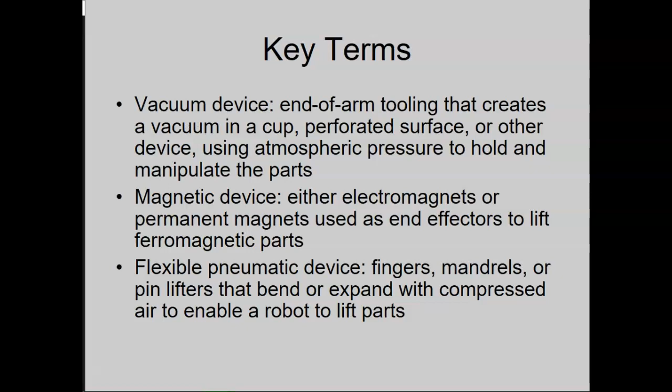So the device, we call it the EOAT, end of arm tooling. Sometimes it's called the end effector. Basically, a lot of people try and call it a gripper. Now, is every tool a gripper? No, it's not. But it's used so widely because it kind of got into mainstream terms. It's kind of like, why is a battery known as a battery and not a cell? Because everybody calls them batteries.

So the function or purpose is to actually do the job the robot was designed for. So think about the tool at the end of the arm like your hand. Anything you do with this, and the dexterity of your hand, these guys are able to do, as long as you create the right tool for it. If you do not have a hand at the end of your arm, the whole arm's kind of useless, right? It can't do anything, because this is what does every job.

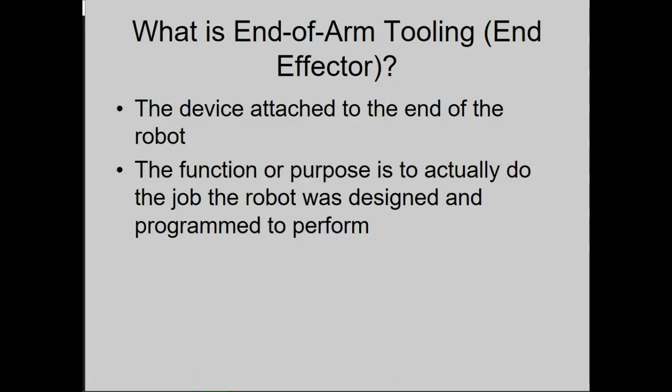I don't care if it's picking up a soda can, writing something, doing things in your day-to-day life, driving and everything else, all of it has to revolve around our hand, right? Without the hand, everything goes, right? That is the whole purpose behind an end-of-arm tool. The whole purpose is to manipulate and move and use the hand it's attached to. Because otherwise, what's the point?

Otherwise, what is the point? So tooling must be able to do what it's meant to do. Here you see it talking about gripping, holding, and releasing. However, that only applies to grippers, or if you're having to pinch something together like a welder. That does not apply so much to something like a paint sprayer, because all a paint sprayer's got to do is spray paint. It's not gripping or grabbing anything.

The tooling can be... I'm going to have to rechange that whole sentence because I don't like the word optional sitting in front of that. The tooling must be able to respond to signals indicating the presence of a part. That is completely optional, okay? I'll tell you why. It's a good idea to do something like that, but that does not mean it has to talk to the robot itself. A lot of the times you have go-betweens between the robot and the line it's attached to, or the equipment it's attached to, generally through PLCs. Now, PLCs will take the signal from sensors and send it back to the robot's controller saying, hey, this has been tripped, execute the program that goes with this.

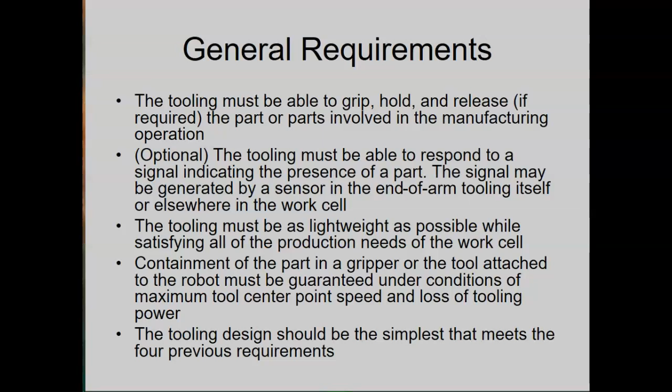Just to clarify again, the whole reason we call these tools things like end of arm tooling - you might hear it as EOAT, the abbreviation for it. You might also hear it called the end effector. You will often hear the term gripper, but it is not generally used in the correct way. A lot of people like to call the end of arm tool a gripper. It is not always a gripper. These guys can do anything you can imagine, not just pick things up and move them.

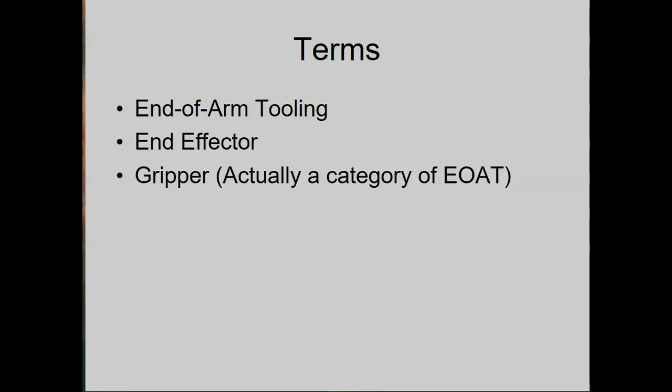So one of the top power supplies for a tool typically is pneumatics. Now, why pneumatics? What do y'all think?

Well, you're on the right track. It's not just so much the air compressor.

The whole reason we like to use pneumatics is for a couple of different things. One, most every shop or factory has a pneumatic compressor. It's a very easy thing to run. You can run pipes and tubes anywhere you need to. It's a very flexible system.

Two, it's very environmentally friendly because once I'm done using the air, it's still just air. I can release it back to the wild. So it's a very clean energy source.

So pneumatics is one of the top things that we use because it is what it is. Basically, you're pulling in air, you're compressing it, and then you're putting it into the tool. There's really not an easier technology. You have springs. Springs are sometimes used.

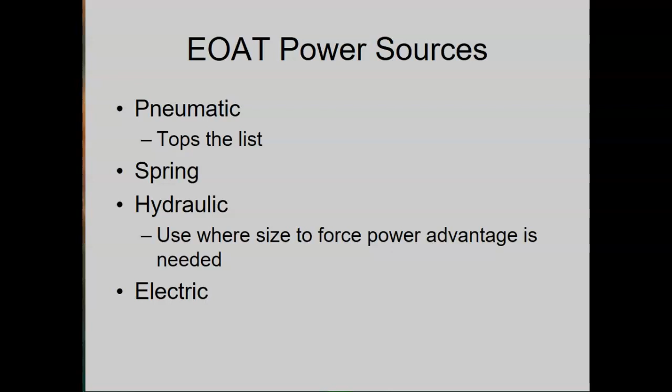So, like I said, hydraulics and pneumatics are the ones that are mainly used, especially pneumatics. Pneumatics are the big popular one, simply because getting it from point A to point B is about like no effort at all.

So you have groups of EOAT. You have standard grippers, which again, I don't really much like the term gripper, but we'll go with it. You have vacuum devices, magnetic devices, flexible pneumatic devices, and special purpose tools.

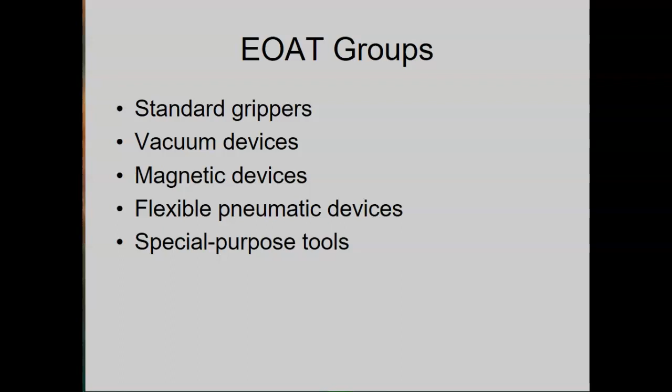Standard grippers - there's a lot of different ways you can make a gripper. The ones we typically think of are like the ones on these 4 robots, a standard parallel gripper. I can also make a gripper with 3 prongs if I'm trying to pick up something cylindrical, or I could bore a hole in a parallel gripper and pick it up that way. It always depends on your needs. Whenever you get a robot, you design that tool based on your needs, not somebody else's design. You base it on what it's going to be doing.

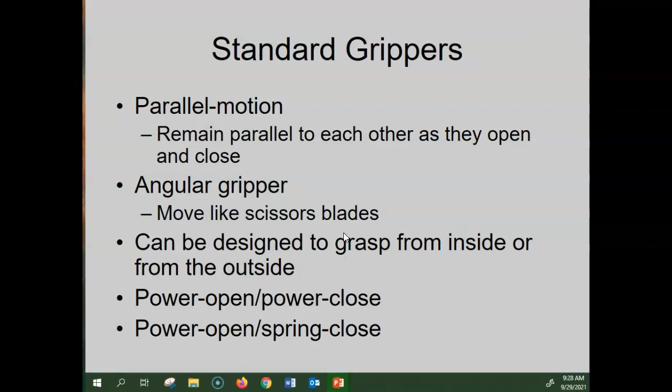So we have parallel motion, where they remain parallel to each other as they open and close. You have angular grippers that move like scissor blades. As far as grasping from the inside or the outside, you have to be kind of careful with those. So you have your angular and your parallel. Parallel is again what we typically think of as a gripper, but I can change the configuration any way I need to so that I can pick up what I've got to pick up. All it takes is a little bit of ingenuity.

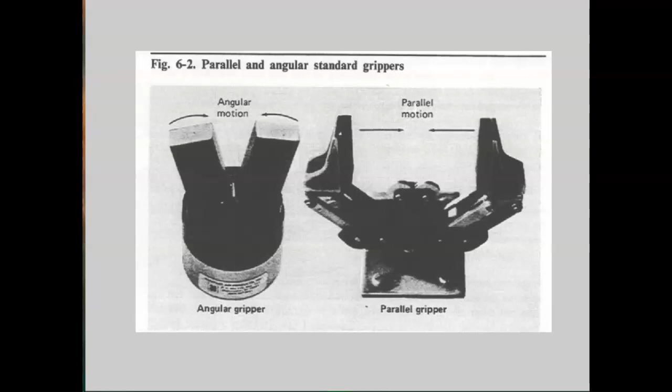The way you pick it up is going to depend upon the product. If the product's outside is delicate, easily broken, you might not want to use pneumatics for that because pneumatics is very hard to control the pressure - exceedingly difficult to control an output pressure. Why? Because air does not like to be told what to do sometimes. So sometimes you're going to come down and grip the externals, but if, let's say it's painted, then instead of messing with the paint on the outside, I might come down on the inside, push it open, and pick it up. Does that make sense?

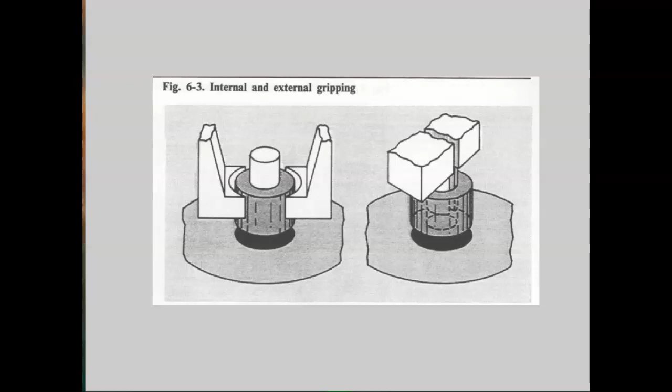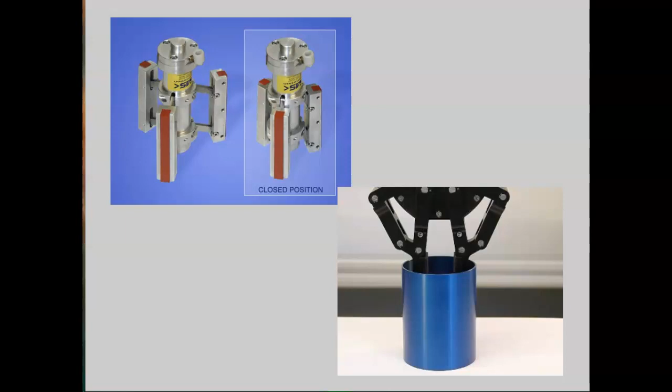Again, it's all dependent upon the product you're dealing with. You don't just have to have a parallel gripper set of 2, you can have a parallel gripper set of 3. For this one, you could run it only one way, because whenever you are not applying force to it, it's going to close itself in. Then you put it down inside the product, trigger it, and it expands itself to fill the space so it picks it up easily. You got the scissor grippers doing the same here.

So, servo versus non-servo grippers. With grippers, we typically keep them very low tech. Why? Because the lower tech you keep something, the less you have to fix it. That's the honest to God truth. The lower tech and the simplest you keep a design, the less you got to crawl through it to fix it.

So you do have some grippers that have the ability to vary their pressure and have tactile sensors to measure that pressure, but that is not the most common nor the norm. The most common ones are open loop systems, and that grip strength depends completely on the air pressure being applied to the system. Most tooling's open loop, again, because it just makes it that much easier to fix down the line. Not to mention, most objects - I won't say all - are fairly sturdy. They're not going to need excessive pressure.

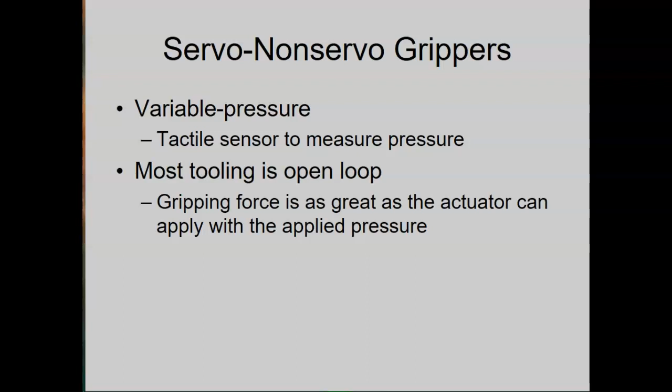We generally keep the pressure about 60 psi, maybe up to 120 if it's a really heavy object. Most of the time, if it's not heavy, we reduce the pressure and we don't have to worry about the gripper breaking it whenever it closes in. So some of them do have tactile sensors, but it is not the norm.

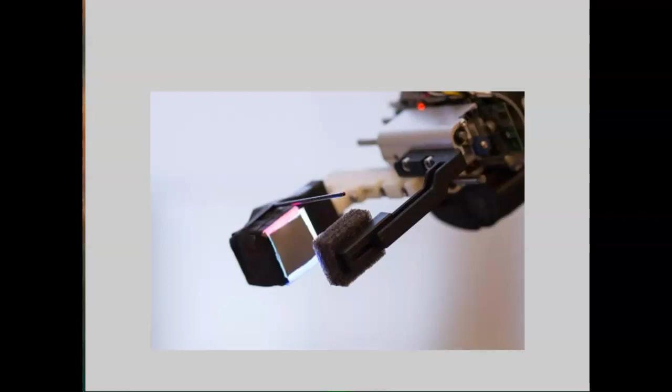You have vacuum devices, used very frequently as well. Why? Because as long as your product is not too heavy, or you can put enough suction cups to it to help you lift it, then they're actually a really good way to pick something up without damaging it.

So atmospheric pressure is 14.7 psi at sea level. What does that mean to y'all? Why is it something we would talk about? Well, the higher you get off the ground, the less pressure there is. The lower you get into the sea, the more pressure there is. With pneumatics, you have to account for that 14.7 psi difference, because that's the air pressure around you - basically the air pressure that's holding you to Earth.

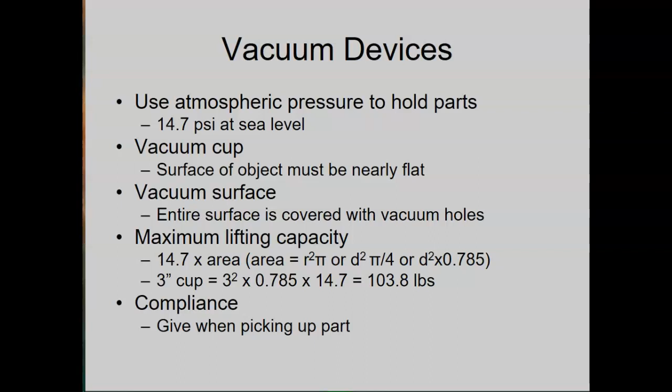So, excuse me, let me back up. What they're describing here is that, again, we talked about 14.7 being the normal pressure at sea level. That means that when you are at sea level, every surface has 14.7 psi pressing against it. Now, why don't we feel that? Well, because we are used to it. This is what we've literally been working with for eternity. All right?

But it also means that that's not helping you whenever you want to get into your jar of spaghetti sauce. Because, I don't know if any of y'all know anything about canning, but the way you can something is essentially you expand all the air out of it by putting it in boiling water. Then you put a cap on it, and when it cools, it creates a vacuum.

Because cold air is what? Cold air kind of is dense, right? So instead of this loose hot air, because hot air expands, cold air retracts, creating that vacuum, which makes it to where the cans will seal.

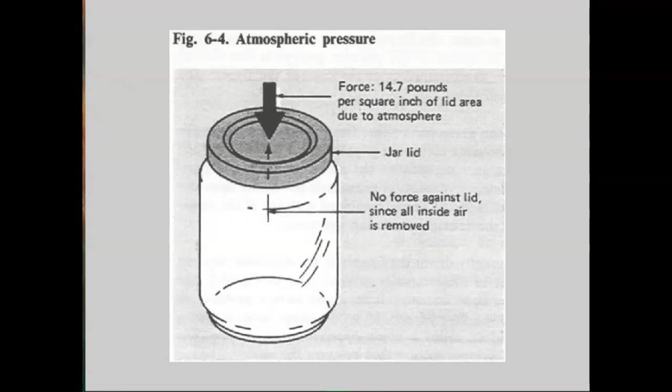Okay? So when you create a vacuum, that's the whole issue with trying to get it open. Okay, so we use vacuums quite frequently, again, not generally for overly heavy things most of the time, just because if you lose power to the vacuum, you don't want something heavy crashing down on your floor. All right.

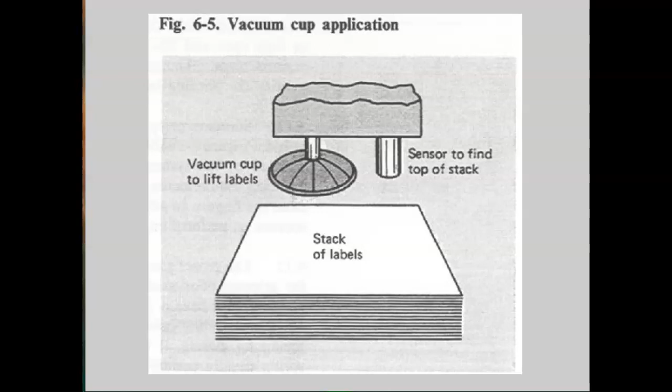So here's some different ways to do it. And the configurations come in whatever is necessary for what. What is it you're trying to pick up, right? What is the size and shape of what you're trying to pick up, and how do you need to pick it up? If you're going to use vacuum power, you need to make sure your surface is completely, A, clean, and B, flat. Right? You can't have little ridges and bumps all in it. It can't seal around that. Right?

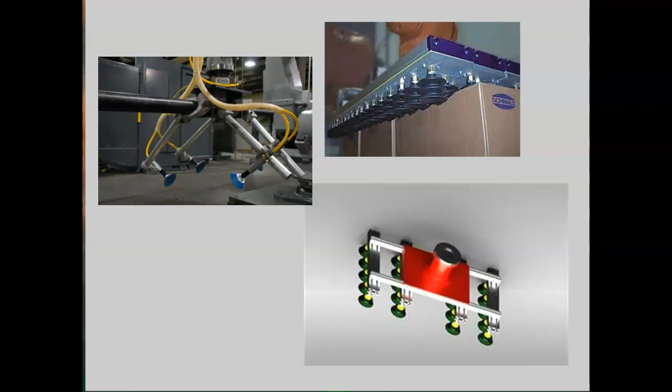But you especially want it clean, because why do we want it clean? So you get good suction to it. Okay? That, and you really want to be careful not to get a bunch of dust into your vacuum generator. That can damage it quite a bit. So we like to use these in fairly clean environments.

Magnetic devices, we have two different types. We have the electromagnet and the permanent magnet. The electromagnet is a better, well, I'm going to say this is my opinion. An electromagnet is a better way to go with these because you can use electricity to turn that on and off. Versus a permanent magnet, which you would have to create a contrary electric field in order for it to let go. That or you're going to be scraping it off the magnet, which is not a really great thing.

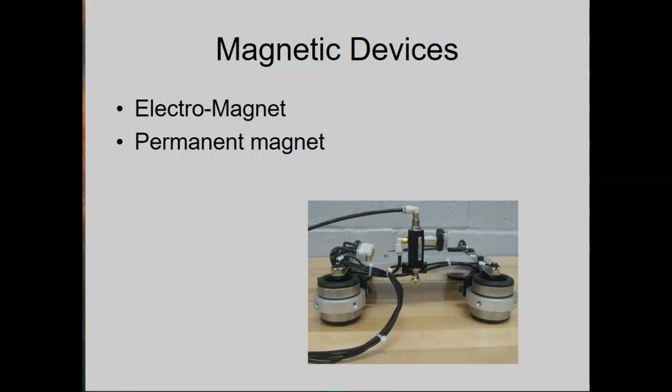So if you want to think about what an electromagnet is, think about the cranes at something like a junkyard. Those are electromagnets because they use electricity to help pick stuff up, especially heavy metallic objects. Now, that does come as a double-edged sword because if you are the person that's picking up something really heavy and you lose electricity without backup, you're going to be dropping whatever it is. So, some things are good, but they can also have their bad side.

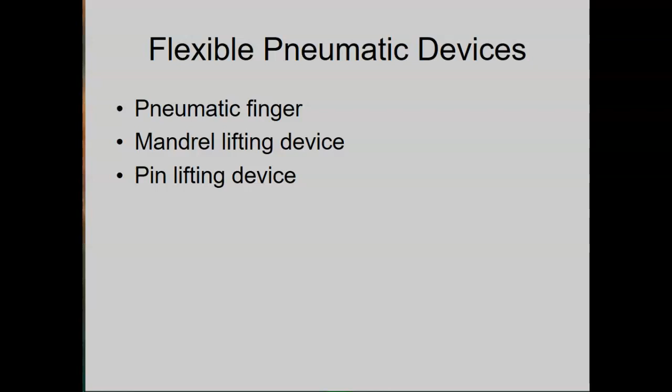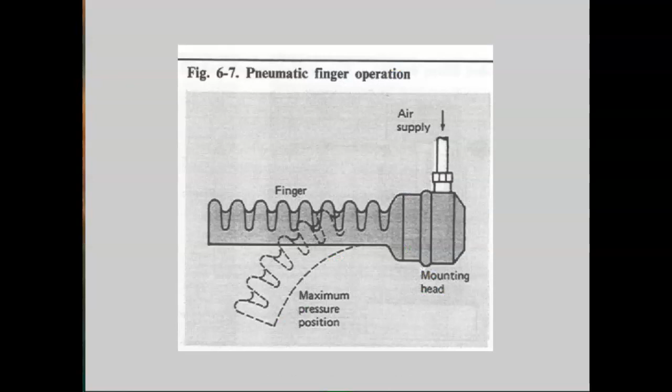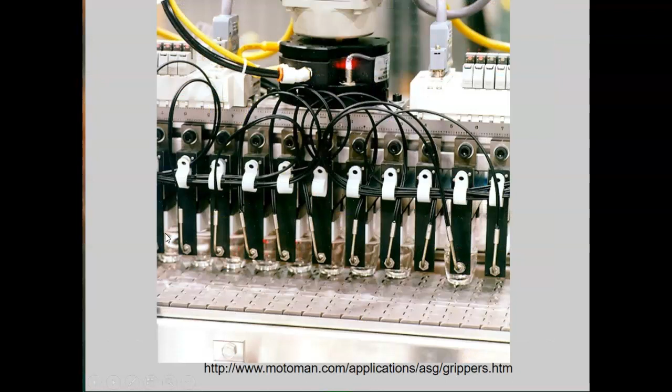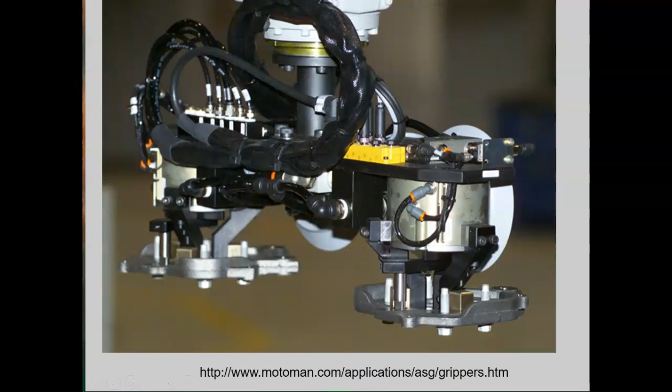Here's another way, same thing here. Trying to see exactly what they've done here, but I think they're trying to use some sort of a gripping device, but I can't really tell. What you can see is presence devices here. Not quite sure what they meant to put on there. So robots can do basically anything we ask of them as long as we give them the right tool.

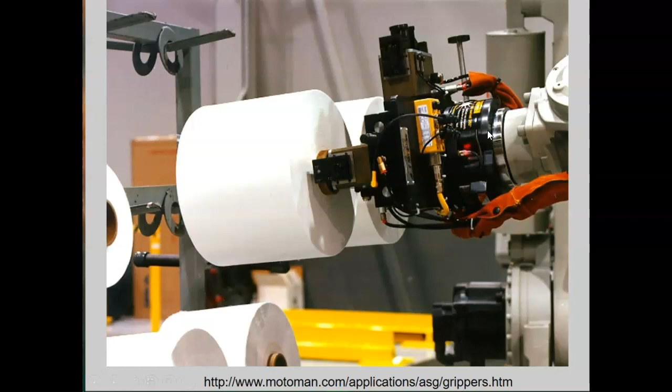And this one's probably, since we're talking about pneumatic devices, the way I can see this working is that it sticks itself into the hole of the roll right there and just expands out. Helps it pick up. Okay.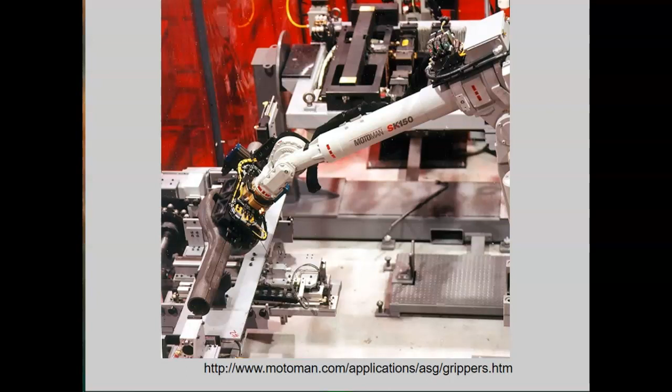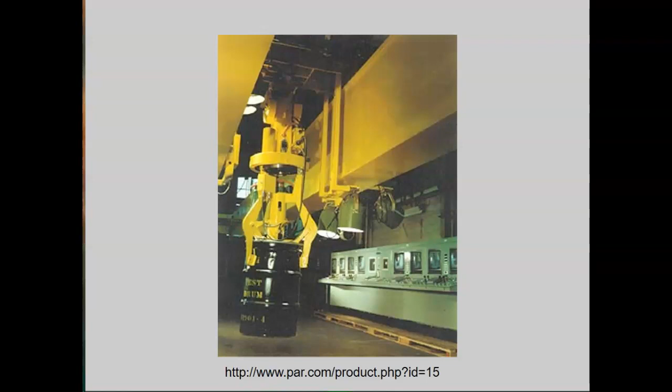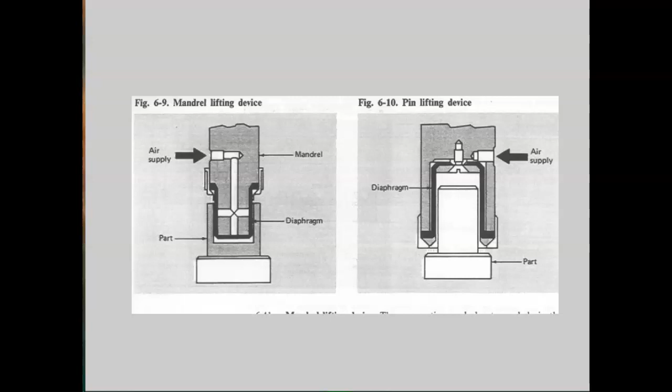All right, so this is talking about pin lifting devices. So again, it works just like a gripper almost, but this is a little bit of a flexibility thing because what you have is a rubber diaphragm wrapped around the inside of this. And just like if you're picking something up with, let's say, a rubber balloon, all it's doing is it's pushing air inside it so that it forces it out or in to help grip something. Does that make sense? And it only lets go when air is not applied.

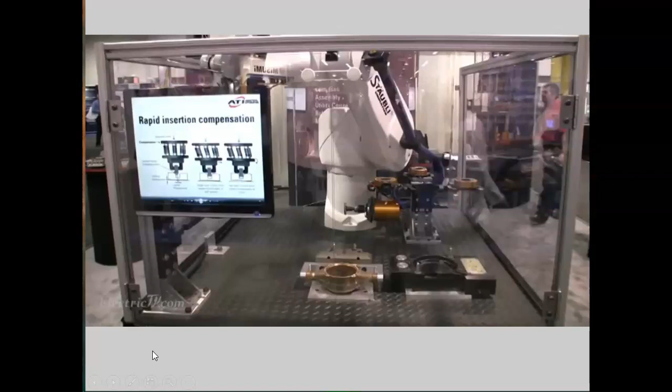Okay, media not found. What the heck? Well, apparently that's not working today. Okay.

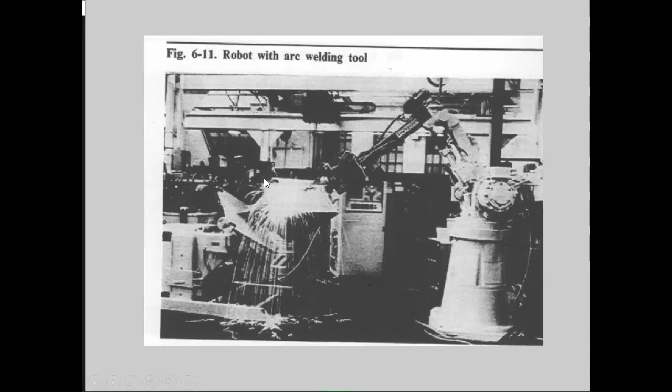So you have robot. This one's got an arc welding tool. You got circular part grippers. But again, I'll just kind of say this with anything to do with a robot's end-of-arm tool. Basically, it's like walking into a hardware store. You can kind of pick whatever tool you need for the right job. But with robots, all you have to do is figure out how to make it. And generally, you're making it from scratch. All right.

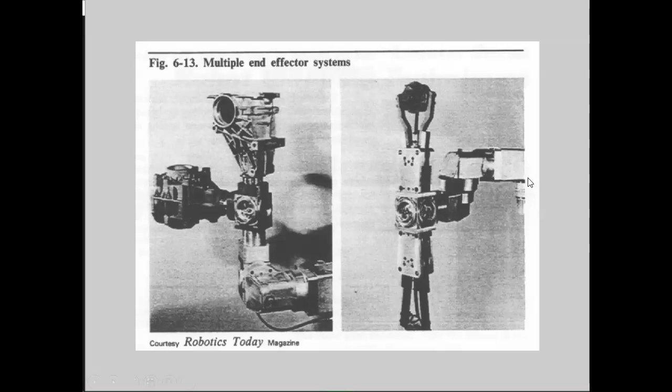Any questions, guys?